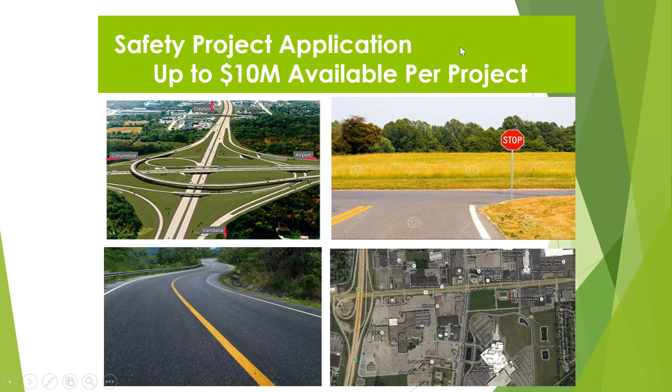The first project we want to talk about today is from the city of Newark. It's an intersection safety improvement project in downtown Newark, at the intersection of 4th Street, which is also State Route 13, and West Main Street. A little background: how did this project begin? It was locally known as a crash hotspot.

The city of Newark was able to work with LCATS. Jeremy, what's LCAT stand for? Licking County what? Licking County Area Transportation Study. All right, so that's what LCAT stands for.

Newark is the county seat of Licking County. So they worked together, knew this intersection was a hotspot, and were able to review the crash history, which met the requirements of 10 or more crashes in a 3-year period. It definitely met that.

These types of projects don't necessarily need to be on any priority ranking list. They just knew it was a locally known crash hotspot, so they worked together, contacted the ODOT District 5 office, discussed it further, and eventually got in contact with Jeremy's office and made an application for HSIP funding. Right now the funding has been allocated for this project, but the project is still fresh—it's not built yet. This is hot off the presses.

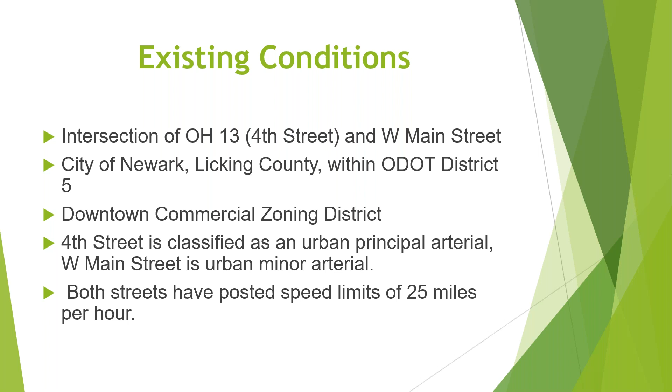The existing conditions in downtown Newark at this intersection: it's located in the downtown commercial zoning district. 4th Street is classified as an urban principal arterial, and West Main Street is an urban minor arterial. Both streets, since they're in the downtown area, have posted speed limits of 25 miles per hour.

If we look at different legs of the intersection, in the northbound and southbound directions, 4th Street has a left turn lane and a shared through right turn lane and one receiving lane. Westbound Main Street has a left turn lane, a shared through right turn lane, and 2 westbound receiving lanes. Eastbound has a right turn lane, a through lane, and a left turn lane, and 1 eastbound receiving lane.

There's angled parking on the curbs and in the median on West Main Street, and parallel parking on 4th Street. There's also bike lanes on 4th Street that run from West Church Street to West Canal Street. And sidewalks are present on both sides of the street in all approaches to the intersection.

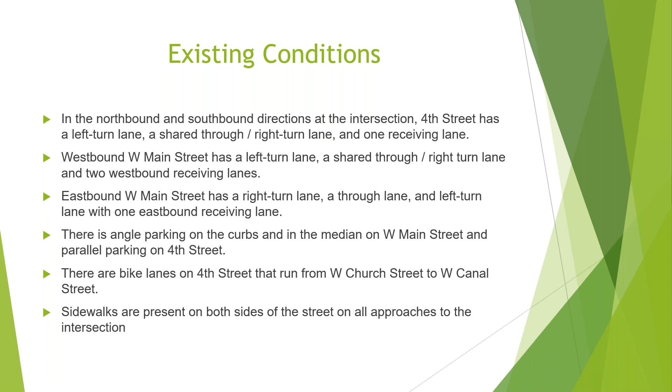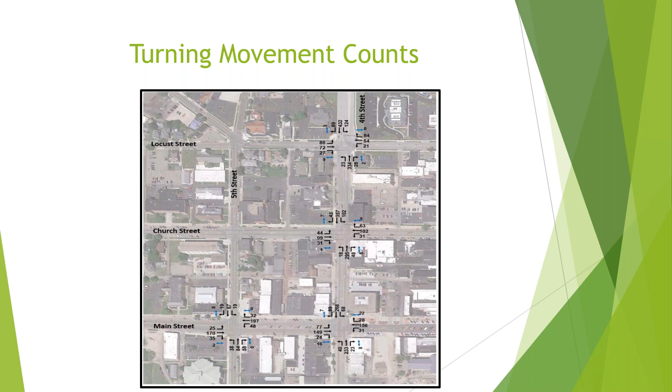As part of the first part of the study, the first thing they do is go out and do a bunch of turning movement counts to get a good grip on the traffic volumes, both for vehicular and pedestrian.

Then they proceeded to do some crash data and analysis. The crashes from the years 2013 through 2017 were studied. They had a total of 53 crashes occurred there. In 2013, there was 15 crashes. In 2014, 11 crashes. 2015, there was 9. In 2016, there was 10. In 2017, there was 8.

Of these crashes, 16 crashes, or 30% of them, resulted in injury crashes. And then 37, or 70%, resulted in property damage only.

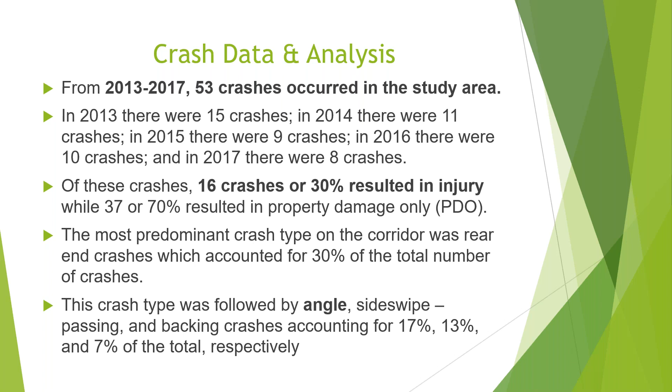The most predominant crash type on the corridor was rear-end crashes, which accounted for 30% of the total number of crashes. This crash type was followed by angle crashes. That's the most serious crash at an intersection, where someone blows a red light or something and runs right into the side of them. Some people call it a T-bone crash, so it's a very dangerous crash. Then there's side swipe passing and also backing crashes. Those accounted for 17, 13, and 7% of the total, respectively.

Based on the detailed crash report, 16 crashes, or 30% of all crashes, involved a driver in the process of parking or leaving a parking spot. 2 crashes involved pedestrians and 2 crashes involved bicyclists. 3 out of the 4 pedestrian and bicycle crashes resulted in injury. This intersection was identified as the highest pedestrian crash location in Licking County.

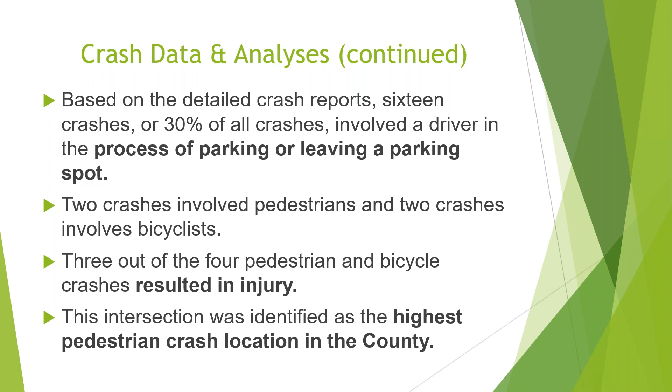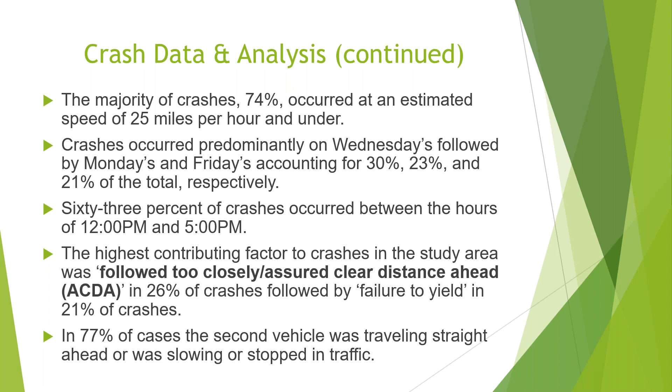A little bit more data: the majority of crashes, 74%, occurred at an estimated speed of 25 miles per hour and under. Crashes occurred predominantly on Wednesdays, followed by Mondays and Fridays, accounting for 30, 23, and 21% of the total, respectively. 63% of the crashes occurred between 12 p.m. and 5 p.m. The highest contributing factor to crashes in the study area was following too closely and failure to have assured clear distance ahead, in 26% of crashes, followed by failure to yield in 21% of crashes. Also, in 77% of cases, the second vehicle was traveling straight ahead or was slowing or stopped in traffic.

As part of the study, they wanted to discuss some of the recent construction in downtown Newark and the effects it had on the crashes. Some of the traffic operations around the courthouse square in downtown Newark were recently converted from a one-way counterclockwise direction to two-way.

The previous square operated with 3 or 4 travel lanes and angled parking along the majority of the square. The square, which surrounds the Licking County Courthouse, underwent construction between 2015 and 2018 and now operates as two-way with 1 lane in each direction and roundabouts at the 4 corners of the square.

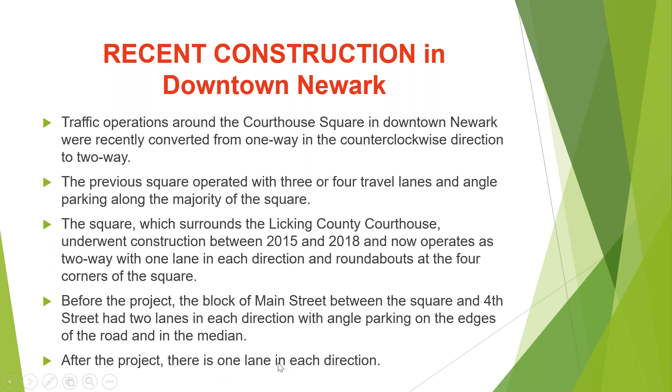Before the project, the block of Main Street between the square and 4th Street had 2 lanes in each direction with angled parking on the edges of the road and in the median. Now, after the project, there's 1 lane in each direction.

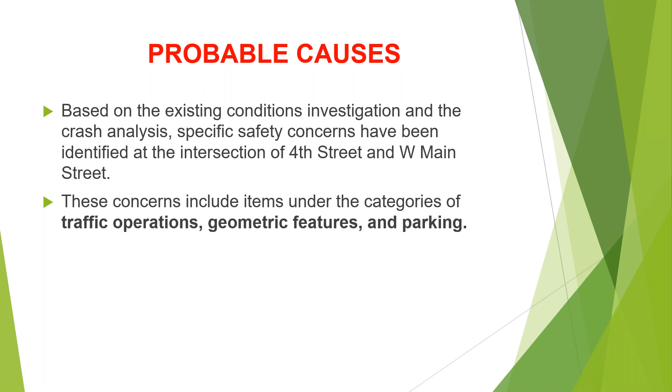They then looked into probable causes of these crashes. Based on the existing conditions, investigation, and the crash analysis, specific safety concerns have been identified at the intersection of 4th Street and West Main, and these include items under the categories of traffic operations, geometric features, and parking.

Looking at the probable causes under traffic operations, when studying it they found that drivers turning left were observed navigating the turns at relatively high speeds, often cutting the corner of the turn, creating a larger conflict zone through the crosswalk and encroaching on the opposing left turn lane.

Also, drivers were observed accelerating during the yellow indication or running red lights to avoid stopping at the intersection. During the peak period, queues from the through traffic on eastbound and westbound West Main Street extend beyond the entrance to the left turn lanes. And queues from the left turning vehicles on West Main Street also extend beyond the length of the turn lanes, blocking the through lanes on West Main Street.

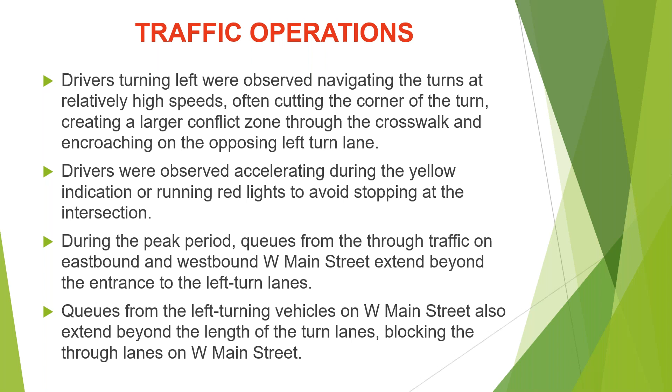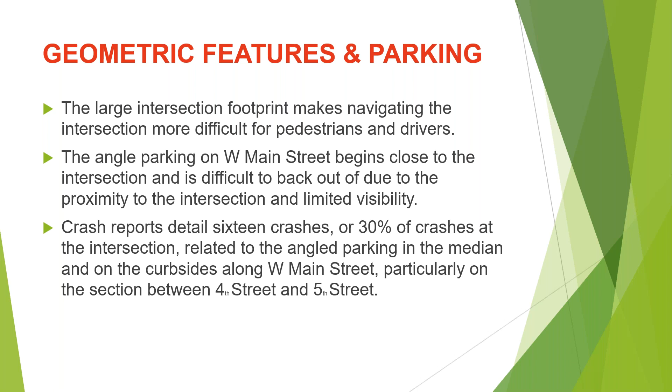And then they noted these geometric features and other discussion about the parking. The large intersection footprint makes navigating the intersection more difficult for pedestrians and drivers. The angle parking on West Main Street begins close to the intersection and is difficult to back out of due to the proximity to the intersection and limited visibility. Crash reports detail 16 crashes, or 30% of crashes at the intersection, related to the angle parking in the median and on the curb sides along West Main Street, particularly on this section between 4th and 5th Street.

So I'm going to turn it over to Jeremy now, and he's going to discuss some of the computerized analysis using the CAM tool and some things that were discovered through that.

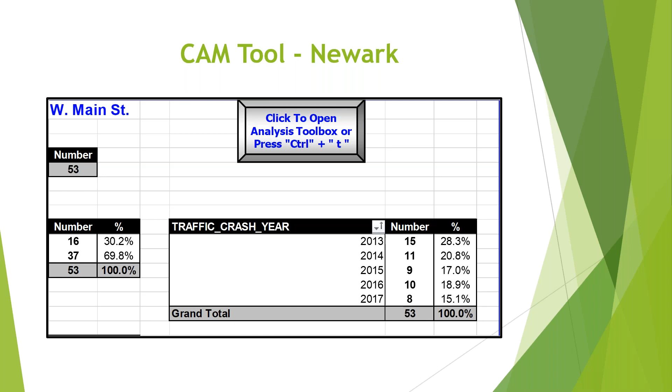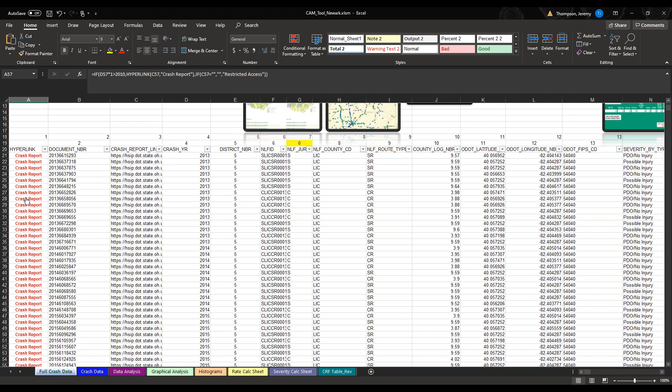Getting into the CAM tool itself, this is what we use to start off our crash analysis. If you've ever taken our GCAT training course, you pull GCAT into the CAM tool. All of this data is from our GCAT, our GIS crash analysis tool, and it's crash reports and data pulled from crash reports, like locations, crash type, crash severity, and information about the units involved in the crash.

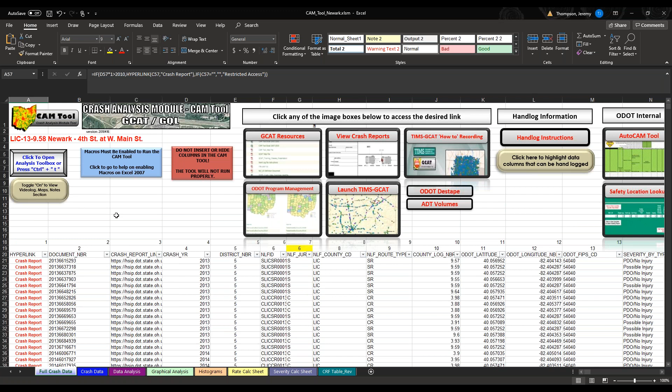So once this data is pulled in, we can start running reports. Running a simple report of this data will pop up with all these tables. A lot of the information that Ray summarized over the last few slides came directly from this CAM tool. We can see there are 53 crashes total, and they ran it over a 5-year period.

We had 30% of those crashes were injury crashes, sorted out by days of the week, hours of the day, types of crash, roadway conditions, lighting conditions. So all the information that gets pulled into these safety studies, or at least the preliminary crash analysis, is directly from this CAM tool, and a lot can be said from that.

We see a lot of angle crashes and rear end crashes that make up almost half of the crashes, just those two types. So this more raw data, I guess, is what was used to create that safety study and come up with the conclusions that Ray's been talking about.

Anything you wanted to add, Ray? I don't think so. So, yeah, every type of crash is represented somewhere on the GCAT tool. Even pedestrians and bicyclists had their own segment in there as well, right?

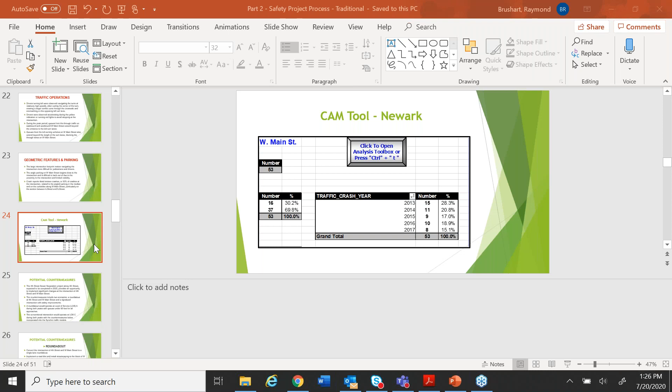Okay, so they went through and analyzed all the crash data, and then they began a discussion of potential countermeasures. A countermeasure would be a safety improvement that addresses the specific types of crashes so that we can lower those types of crashes.

So one of the things that was important here for this project was that the city of Newark already had a major project about to begin, the 4th Street Sewer Separation Project, which runs along 4th Street and is expected to be completed sometime this year. That provides an opportunity to implement significant changes at the intersection of 4th Street and West Main Street, opening up discussion for something other than just typical traffic signal upgrades and improvements.

So now the countermeasures included two scenarios. One is a roundabout at 4th and West Main, and then the typical signalized intersection improvements.

So what they discovered was, after they did the computer analysis, that they projected a roundabout would operate at level of service A during both peak periods, with queues of traffic under 90 feet for all approaches. That in itself is a really big improvement for that intersection. If they decided to go with conventional signalized intersection improvements, that would operate at level of service C during both peaks, with the countermeasures incorporated into the Synchro traffic model. Synchro is the name of the computerized program that analyzes what the level of service would be.

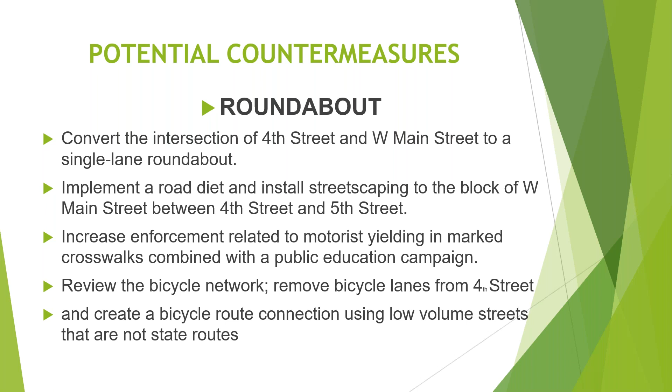So if they installed the roundabout, they would convert the intersection of 4th Street and West Main to a single lane roundabout. Along with that, they would implement a road diet and install streetscaping to the block of West Main Street between 4th and 5th Street. They would increase enforcement related to motorist yielding in marked crosswalks, combined with a public education campaign, so the public would be more aware of things like how to deal with pedestrians, and pedestrians would learn how to properly cross the street. They would also review the bicycle network, removing bicycle lanes from 4th Street and creating a bicycle route connection using lower volume streets that are not state routes.

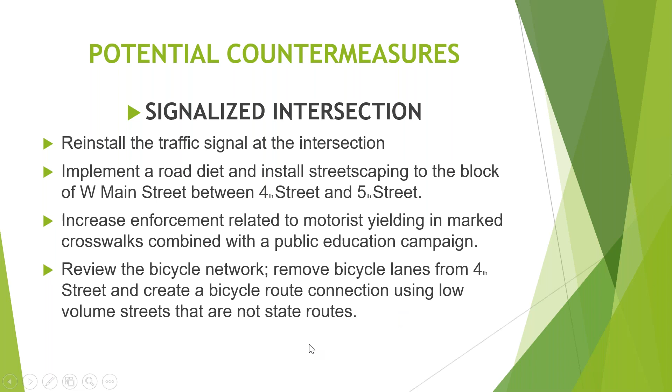If they were going to go the route of upgrading the signal, they would reinstall the traffic signal at the intersection, and do some of the same things that would go along with the roundabout. They would still implement the road diet and install streetscaping to the block of West Main between 4th and 5th, increase enforcement related to motorist yielding and the public education campaign, and review the bicycle network, removing bicycle lanes from 4th and creating a bike route connection using low volume streets that are not state routes.

So they went, after some analysis, doing some benefit cost analysis and such. Amazingly, both projects had almost the same price tag. I believe the roundabout was just a little bit more.

What they've concluded was, first of all, they wanted to note that the intersection of 4th and West Main was analyzed in the safety study. It was identified as the highest pedestrian crash location in Licking County, and based on a field visit, corridor crash analysis, and engineering evaluation, a combination of traffic operations, geometric factors, and parking configuration were determined to contribute to crashes on the corridor. Also, in light of the fact that the 4th Street Sewer Separation Project provides an opportunity to implement more countermeasures than just a signal improvement.

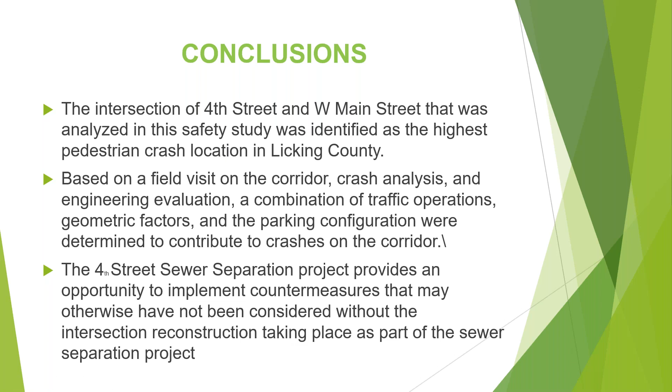They went on to decide that the roundabout scenario is what they recommend at this intersection.

With this study, it was reviewed by the review committee, and Jeremy, you guys went along with this conclusion, right? Yep, sure did.

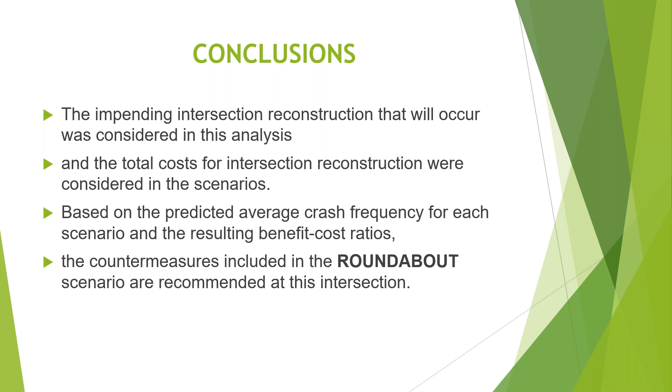Okay, so I wanted to note there's a polling question, and I know there was a lot of words on that screen. I didn't really know how else to do it. I know you shouldn't make your screen PowerPoint slide so wordy, but I wanted to make sure, since everyone was requesting a printout or handout, that you had all that information on there.

But I want to know how everyone in the audience feels today about this: if you lived in Newark, would you prefer to have the roundabout, or would you have preferred the signalized intersection improvement? So how about Paula, why don't you run that out there as a polling question?

All right, Ray, it is open. I have about 70% voted right now. So far, we have about 82% who vote for the roundabout and 18% who vote for the signalized intersection improvements.

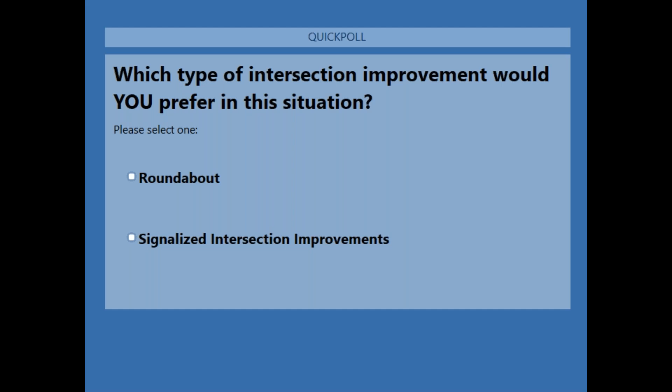Oh, okay, it's a big majority. I'm kind of surprised. Maybe it's because there are already some other roundabouts in downtown Newark, but we get varying feedback all over the state for different locations, especially if it's something relatively new in the area. You'd be surprised, a lot of people are not in favor of roundabouts, but historically, after some public education and a few months of people going through the roundabout after it's built, they totally change their mind and really like the roundabouts.

That's been our feedback thus far. So do we have any questions in particular about this Newark project from anybody, or any other questions so far? I'll take that as no.

Well, let's go ahead and continue then. Our next project is much different from the Newark project. It is a rural area, and it's not just an intersection, it's a corridor.

So it's the Tuscarawas County Road 82. Yes, it's a county road, not a state route. Hang on here, I see a chat thing here.

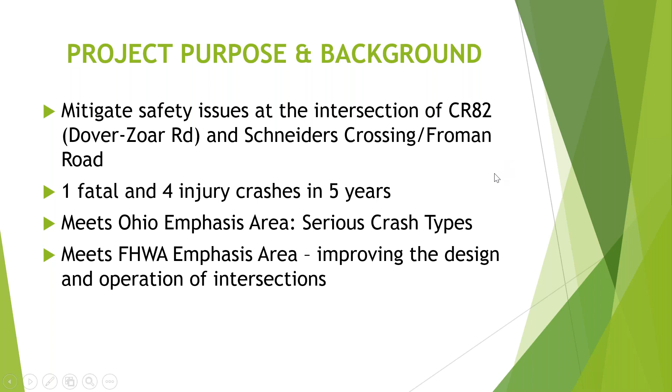Okay, and then if we take a look at the safety study, it had these different chapters. Besides the introduction, it has a chapter for existing conditions, looking at the crash analysis over those 5 years. It also ran a multi-way stop warrant analysis for the intersection of County Road 82 and Zoar Road, and it recommended some short and medium term countermeasures. The appendices of the study contain the traffic data and different crash diagrams.

This is interesting, a curve study throughout the entire corridor. This section of County Road 82 has lots of curves, so they studied each one of those curves, making sure that they had all the necessary advanced warning signs and guidance throughout the curves from beginning to end, like chevrons or a large arrow.

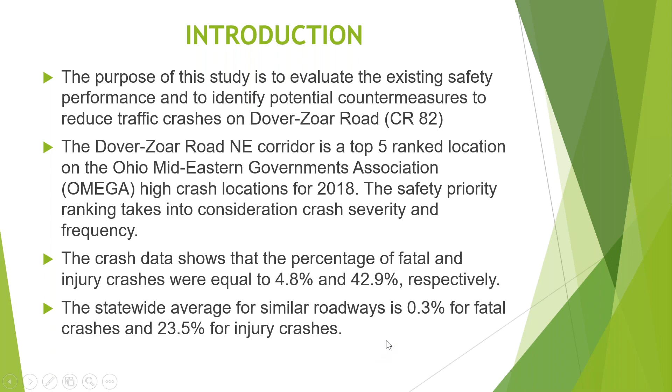So there were 2 fatal crashes that occurred within the study area. One fatal crash was a fixed object crash that occurred 1,900 feet north of Blacksnake Hill Road, which is Township Road 380. It involved a single vehicle that rolled over on the east side of the roadway at 4:15 a.m. on September 16th, 2017, which was a Saturday. The other fatal crash consisted of an angle crash, which is the worst type of crash you can have at an intersection.

This occurred at the Schneider's Crossing Road Northwest, County Road 80, and County Road 82 intersection. In that crash, an eastbound vehicle ran the stop sign and struck a southbound vehicle on Dover-Zoar Road around 2 p.m. on December 27th, 2017, a Wednesday.

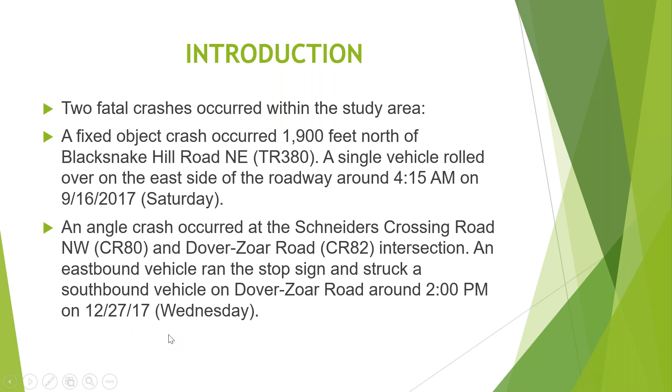County Road 82 is classified as a rural major collector. It's a north-south county route that connects the city of Dover and the village of Zoar. The Zoar Village Golf Course is located near the north end of the study area. The Tuscarawas County engineer maintains this roadway, a 2-lane rural road with a pavement width of 22 feet.

They measured the speed out there. The 85th percentile speed was 47.6 miles per hour, measured at a location north of the Schneider's Crossing Road intersection.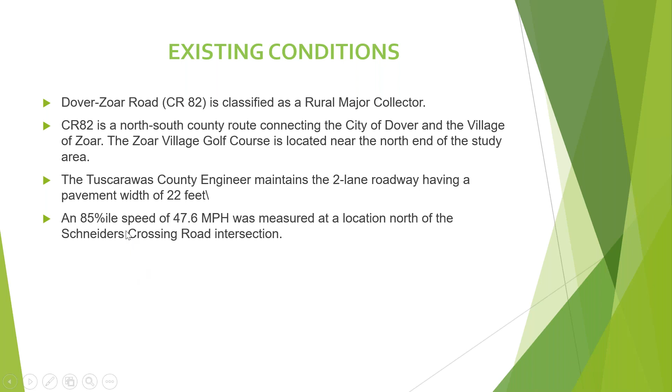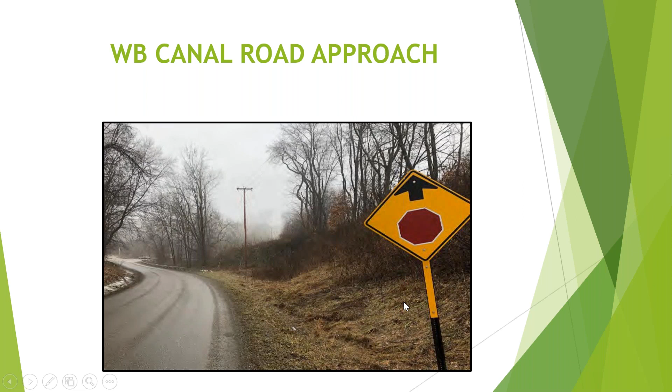Here's an example of a sight distance issue. This is Schneider Road intersecting with County Road 82. You can see as we look to the left that there's a hump followed by a dip, so we can't really tell if a car is coming or not. And if a car is coming, they'll be approaching at high speed since it's a 55-mile-per-hour roadway. So sight distance is very important.

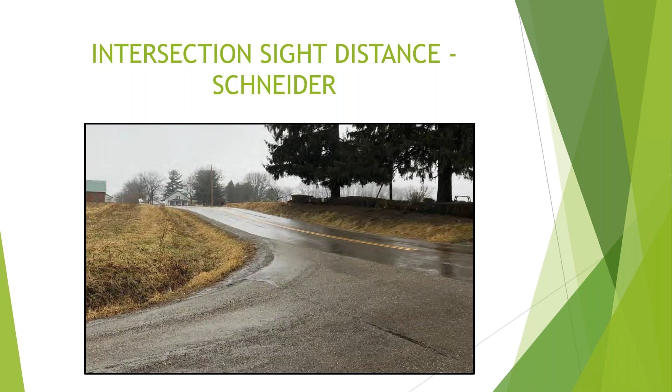Here's our crash map for this corridor. Every dot represents a crash, and the colors show different types of crashes. You can see the 2 red dots, one here and one there—those are where the fatal crashes occurred. Yellow is an injury crash, and you can see there are several injury crashes here.

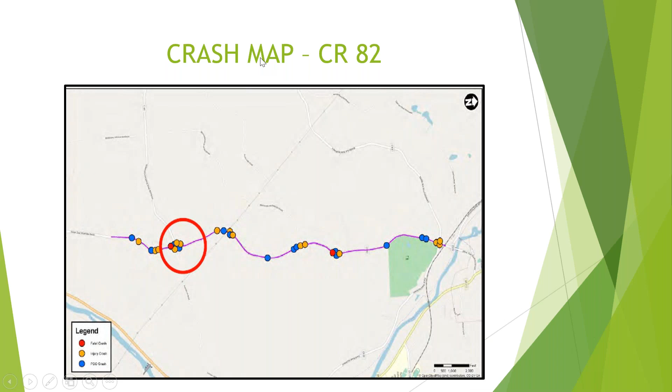They went carefully through all the crash data and analyzed it. The crash data was obtained from the ODOT TIMS database, which consisted of a total of 42 crashes. They reviewed each crash report, called the OH1, for each documented crash, checking for accuracy and to locate crashes that were within the study limits.

There's a breakdown of the percentage of each type of crash: fatal crashes 4.8%, injury crashes 42.9%, fixed object 52.4%, and half of the crashes occurred at night.

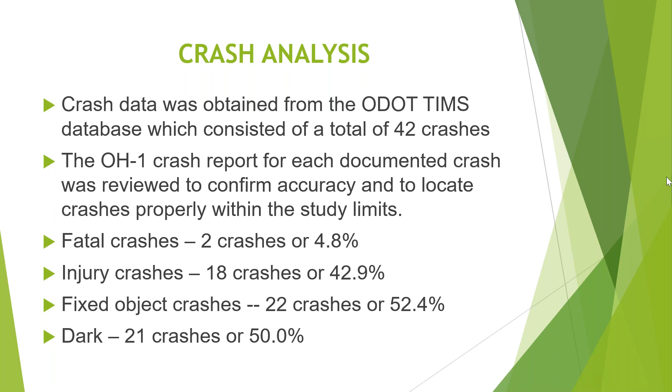Let's see, do we have a question? We'll get to that one later.

Here's a frequency chart of crashes by year and severity. You see the green here, that's the fatal crash. Both fatal crashes occurred in 2017.

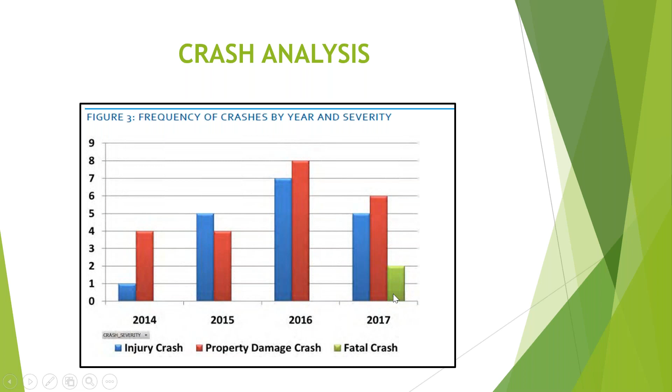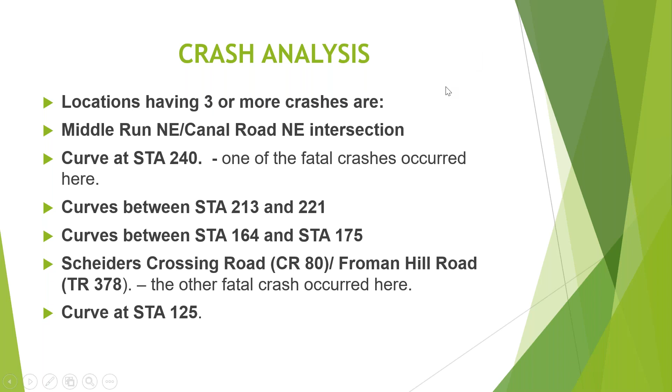At that intersection, they wanted to study it to see if it maybe meets the warrants for a multi-way stop sign installation. So they went through the entire process of a multi-way stop warrant analysis, following the methods shown in the OMUTCD, the Ohio Manual of Uniform Traffic Control Devices. For an intersection to be a 4-way stop, it has to meet at least 2 of these criteria.

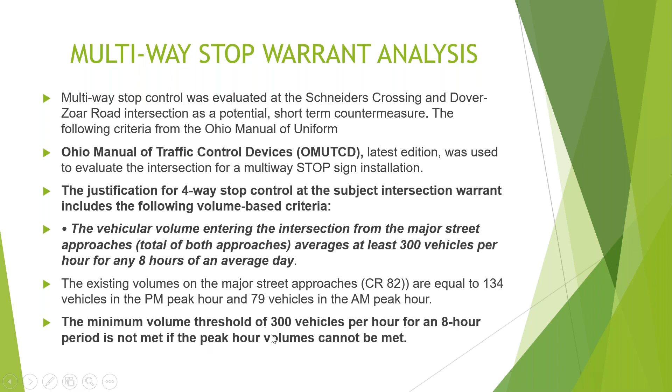One criterion is the vehicular volume entering the intersection from the major street approaches: total of both approaches averaging at least 300 vehicles per hour for any 8 hours of an average day. They looked at the volumes there, and the existing volumes on the major street approaches of County Road 82 were 134 vehicles in the PM peak hour and 79 vehicles in the AM peak hour. So even the peak hour volumes did not meet the 300 vehicles per hour threshold.

They also reviewed the combined vehicular, pedestrian, and bicycle volume entering the intersection from the minor street approaches, totaling both approaches averaging at least 200 units per hour for the same hours, with an average delay to minor street vehicular traffic of at least 30 seconds per vehicle during the highest hour. They reviewed it from that perspective, and it still did not meet the criteria.

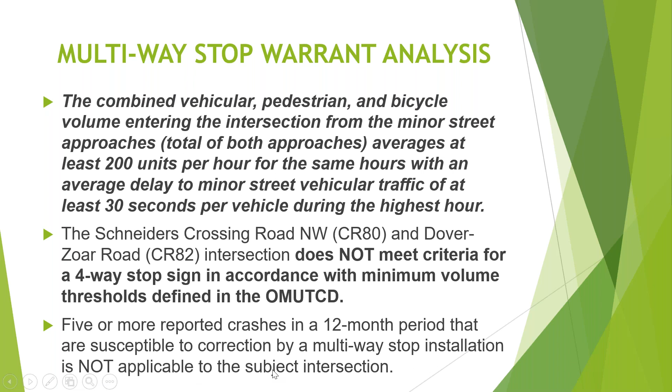They also looked at it from the aspect of 5 or more reported crashes in a 12-month period that are susceptible to correction by a multi-way stop installation, and they determined that was not applicable to this intersection.

So then we got down to the computer analysis here with the CAM tool, and also reviewing the curve study data. So I was going to let Jeremy speak to this one. Yeah Paula, I'll share my screen again if that's okay.

Similar to the Newark project, the safety study was performed by first analyzing this crash data within the CAM tool. Like Ray mentioned, there were 10 crashes in a 5-year period, which is not our standard minimum amount of crashes necessary to get a project funded with safety dollars. But because 40% of these 10 were injury crashes and we had the fatal crash, we decided to file the application and take that into account when it came time to present.

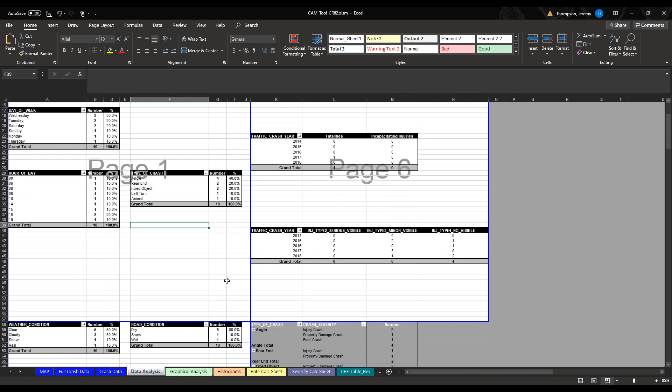Just some other highlights: the angle crashes at the intersections specifically, that vertical curve and profile alignment should help fix. Some standard systemic treatments along the corridor, like signage, which was mentioned, are also a great way to mitigate some of these serious crashes, just bring more visibility to the corridor. Same thing with the other one.

The CAM tool is great for a preliminary crash analysis, and it's done as the first step in most, or all, of our safety studies. But it can be taken as a measure outside of a safety study, just to get a general idea of crash trends or issues that may lie at a certain intersection or certain segments that may be within your local agency's maintenance authority. So that's all I had.

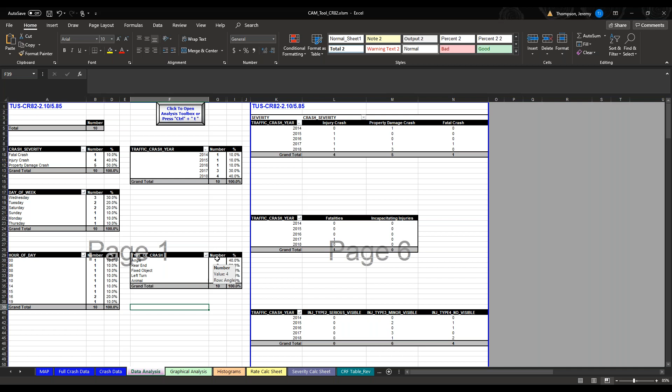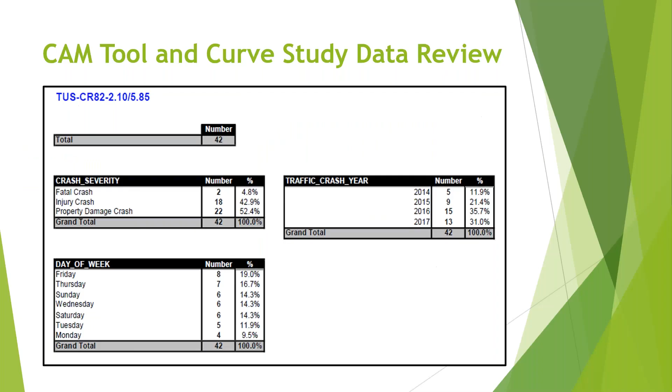If you want to go back to the PowerPoint, Ray. All right. Thank you, Jeremy.

So after reviewing all the crash data, they then went into trying to determine what sort of countermeasures they can install out here that will decrease the number of those specific types of crashes. The most expensive part of the project was doing some profile work at the intersection of County Road 82 and Schneider's Crossing.

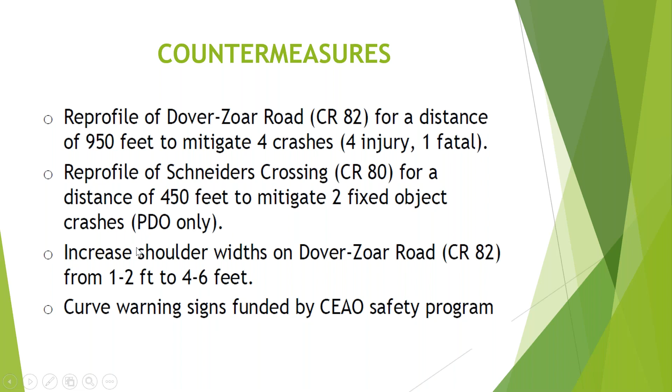To improve sight distance, and maybe some realignment to make them a better 90-degree angle intersection, and some shoulder widening. The shoulders on the road there were 1 to 2 feet, and now they're going to be 4 to 6 feet wide. Also, proper signage and striping and things like that.

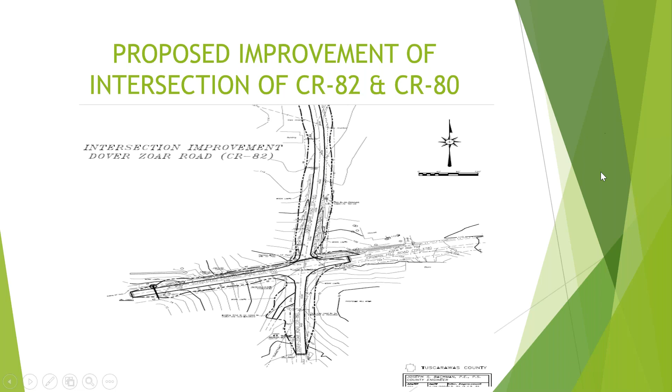There was excavation for vertical alignment revisions, improvements to the ditches as well, all to improve sight distance, embankment for fill areas for vertical alignment revisions. As far as traffic changes, there'll be new signs put in for better advance warning. Also, pavement markings will be reapplied for double yellow center line on all 4 approaches, and also some drainage work, drainage pipes and culverts and things like that, better ditches for better drainage. So all this adds up to a much safer intersection than the existing.

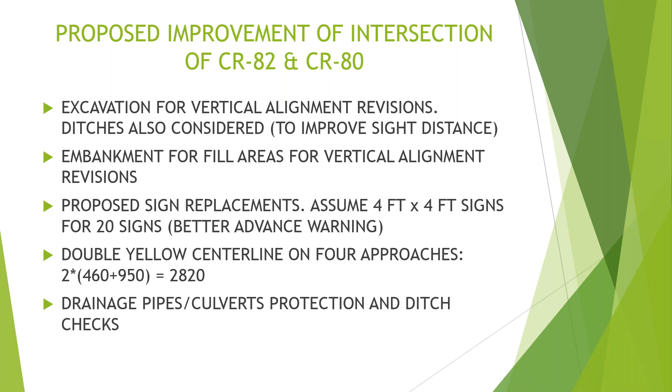As far as the rest of the corridor, there were a lot of curve studies, so there are going to be a lot of new signs for better advance warning, and also advisory speed plaques attached to the warning signs so that people will know what speed to slow down to get through the curve safely. Some of them will have large arrows, and a lot of them will have more chevrons as well. The chevrons provide guidance from the beginning of curvature all the way through to the end of curvature where the road becomes straight again.

Then there's also some resurfacing and new pavement markings for edge lines and center lines as well. So it will be a much safer corridor with all these improvements. That's all I have for that one.

Is there any questions that we have for this particular one? I think there was a question we didn't get to for the first project. Let's see what that one was.

It says for the Newark roundabout, does the ECAT or GCAT analyze pedestrian crashes? Wouldn't pedestrian crossing signals be safer for pedestrians versus a roundabout? Do you want to speak to that one, Jeremy?

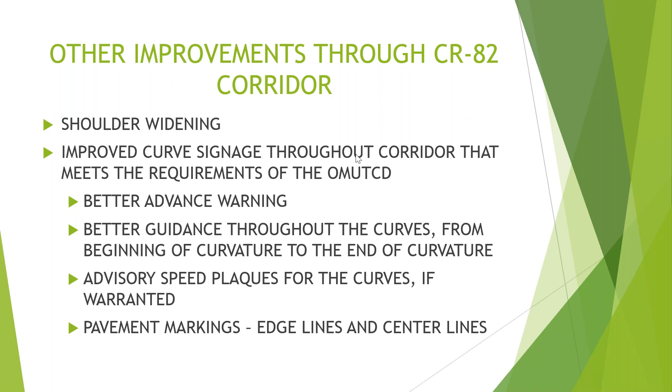I think I can show that picture. Can everybody see my screen? What do you see, Jeremy, on the screen? Yeah, the safety study. So here's a picture, that's kind of where it's superimposed. But back here would be like a pedestrian crossing.

One of the main important things is when a car is turning right. I don't know if you can see my hand on the screen, the mouse. If someone's turning right in a roundabout, you have to be looking towards your left. So you're really focused on making sure no one's coming from the left, and then you pull out. So you don't want the pedestrian crossing right here close to the roundabout. On this design, the crossing is put back here. So then the driver can refocus from left to right and straight ahead, and they'll see the pedestrian better. That's the reason for the crossing being here versus where the old crossing was.

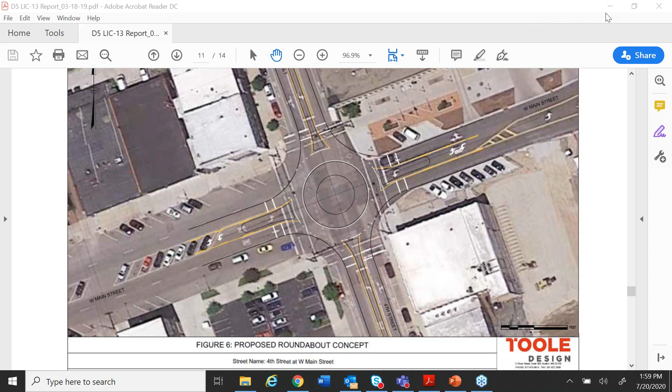If not, I can share my screen again, and I'll go through some of the things that the committee saw and some of the additional recommendations that came out of both of these projects, because there were some comments that were more suggestive or just wanted these projects to alter slightly. So I can go through that. There are no questions in the box at this time.

So granted, this score was lower, but there were some things we could do and suggest to bump this up. One thing was this benefit cost ratio was a 0.7, and one of the things we have to do when funding these projects is justify the cost. Usually cost justification means bringing this up to at least 1.0. So our response to this application was offering the city of Newark 70% of what they asked for, because that would bring our benefit cost to 1.0. And they accepted it, they were willing to front that extra 30%. So that put a score in this box.

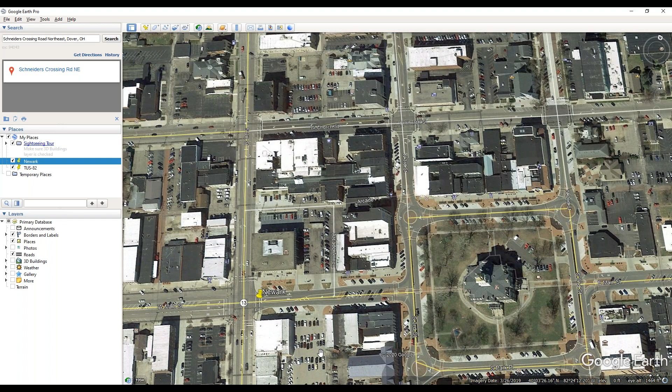And just beyond score, they are working towards making this roundabout countermeasure a corridor-wide or system-wide thing in their city. Currently, they have these 4 roundabouts just east of our project location, which is where this pin is. And beyond that, outside of this project, this north intersection is another one that they are pursuing a roundabout for, which they are expected to handle solely themselves. The graphic for that is here. So this bottom one is the roundabout we're helping fund through this application, and this top one is another roundabout they plan to put in just north of there.

We saw this as a committee on the Newark one. I'll highlight both of these projects. Their safety studies were funded through our local safety assistance program that I manage now, and these were 2 of the first studies we funded through this program. We have about an 87% success rate in studies resulting in projects thus far. We've done about 50 studies through the program now.

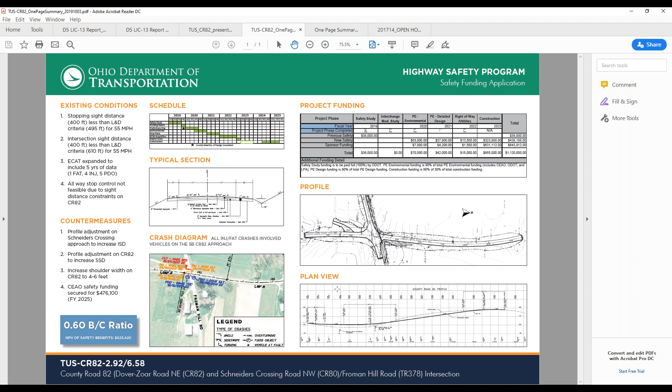Anything to add, Ray? Well, when you say beyond what the score shows, I think what you said last week, in the first part, was sometimes that involves pedestrian improvements and bicycle improvements.

Hey guys, we have a question. Doug asks, do you recall the cost of the studies? A typical study costs us around 30 thousand. Let me take a look.

So for the Tuscarawas County job, we put in 38,000 for the study. They notified us that we had already spent $38,000 working towards this project. I usually estimate in the $30,000 to $35,000 range. I think this one, because it was a longer corridor, expanded beyond the intersection, and not necessarily just a spot study, it was a little more expensive.

In Newark, we don't have that information right here, but I'm going to assume this one was probably in the $25,000 to $30,000 mark, since it was just an intersection.

And the cost of that study, it came out of your program, right, Jeremy, not the locals' pocket? Right. Yep.

So that's pretty important, right, locals? That's one of the reasons we're having this series, is to let locals know that they can have studies done and projects done where it might cost them $0, right, Jeremy, in some cases? Right. Yeah, we mentioned it last week, but this year we have been offering 100% project funding through our application process. Of course, that's all highly revenue driven through the new user tax, gas tax. So that program might either be put on hiatus or not go as long as we want, but that 90-10 rule is always going to be there. And that 90-10 rule, we don't want to apply to this upfront study stuff, so those will still be 100% funded.

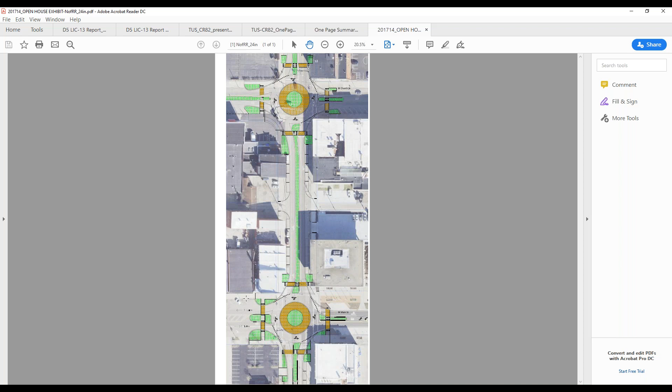I know another thing we've talked about is back-in parking. Was that considered, or is it still head-in parking? We will touch on that when we talk about the Coshocton systemic analysis. But yeah, I guess if you're having parking safety issues in your city, and it's front pull-in angle parking, we know that keeps more parking spots than standard parallel parking. So a good way to make that safer is to change it to back-in angle parking, so you can keep the same amount of parking spots, but it's safer than front angle parking.

Looks like we have another question. What is the average daily traffic threshold for a 1-lane versus 2-lane roundabout, and when might one step up to a 2-lane roundabout?

Just a ballpark number - I'm not a roadway engineer, but from what I've seen, usually I think the addition of the 2 crossing streets shouldn't be more than that 20,000 to 25,000 range. Under 20,000 would be a single lane, over 25,000 would be a dual, and in the middle you'd have to do some further analysis - just as a high-level starting point. Of course, the analysis should always be done.

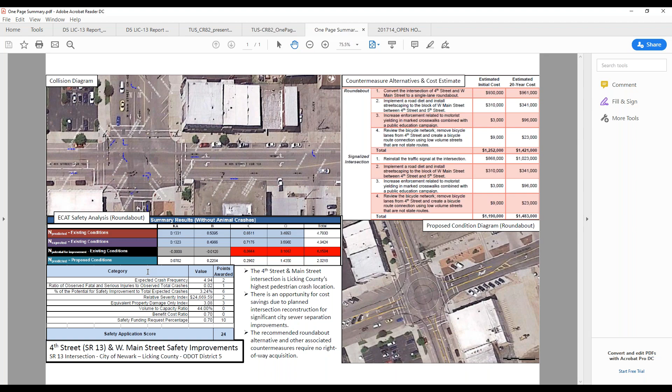Okay, good question. And about the other one there, I thought moving parking further away from the intersection would eliminate some of those high crash parking maneuvers - probably the ones that were closest to the intersection.